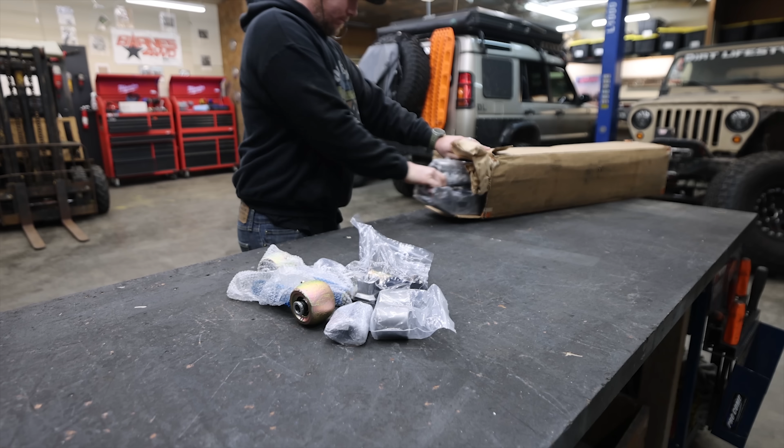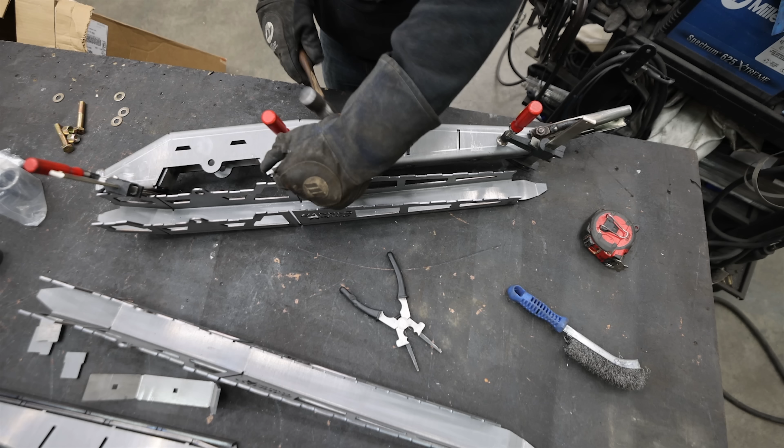I've been getting requests for quite a while now to do a build with trailing arm rear suspension. This has blown up in popularity, and it's something that's very enticing for a lot of reasons, but it's also something that you just need the right project for. And I think that I finally have the right situation to build a set of trailing arms. It's something that we can play with over the coming months. It's something we can tune. And today I'm going to go through all the details on when you would use it, when you wouldn't, and if this is something that you should start planning for on your rig.

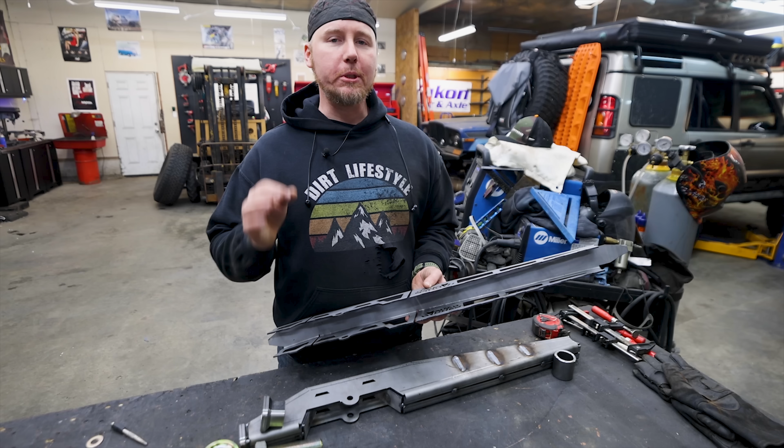Like anybody who builds an off-road truck, I want to have my cake and eat it too. So today we're going to try and keep the rear airbags. We are going to change our rear suspension to coilovers so that we can have both a coilover and a rear airbag. And I'm hoping that by the end of the video, we can have this sitting under its own weight. We can pull some measurements and calculate to see how close I got on the guess for the spring rate on such a heavy truck.

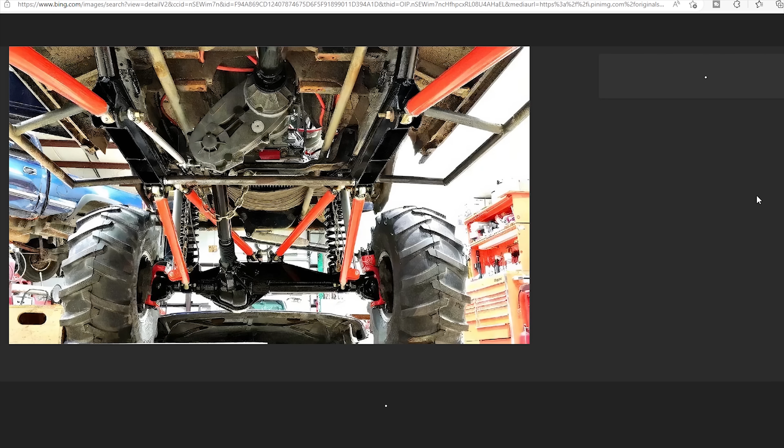The term trailing arm is a little bit confusing for some people because if you look at a modern four-link rear suspension, the arms are already trailing the rest of the vehicle. So we're not going to redesign the suspension geometry or anything in this vehicle, but we are going to replace the lower link with a link that allows us to move the coil off of the axle and move it right onto the suspension link itself in order to free up some space for packaging and give us something that's kind of fun to tune off-road for a number of reasons.

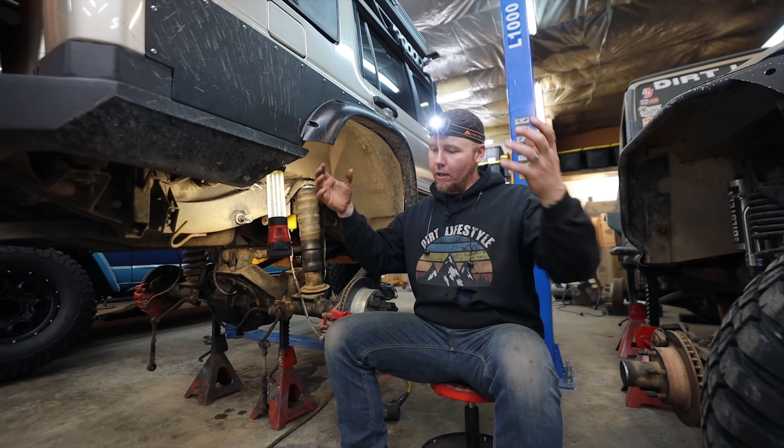When I'm building something that requires as much welding as those trailing arms, I like to do it in segments and let things cool down and then finish the next segment and let things cool down. So right now, I'm letting them cool down completely before I start to grind things and fit them into a lower sleeve that we're then going to weld up. The whole reason for that is that you don't want to get stuff super hot and expanded and then start to lock it in with other welds, and then whenever it cools down you have a whole bunch of really weird stuff going on. So that's why I want to let it cool completely. We're going to grind it down smooth enough to fit in those lower sleeves, and then we can finish weld them and we can chop and modify them.

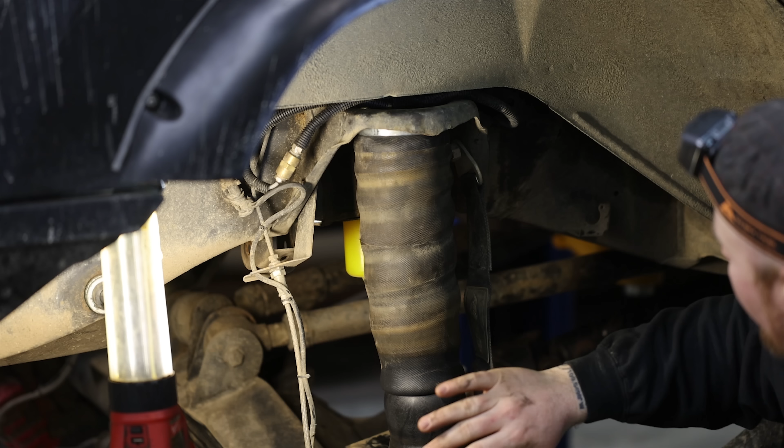So now what I'm doing just to kill some time is getting everything taken out. I already took the spring off, so we're trying to get rid of this spring altogether. I've taken the spring out, I've taken our shock out, and now we're going to just leave the airbag. This is a factory style Land Rover airbag that we're just going to leave in place because it fits here perfectly. And then we're going to pull the lower control arms. We're going to measure the eye to eye, and then we'll build the new control arms to meet that measurement. And we do have a little bit of flexibility on one side of that joint.

So right now, I am going to pull this lower control arm out, so at least we have a measurement to go by, and I'm going to go over and continue to weld up these trailing arms because that's really the first step of this entire process.

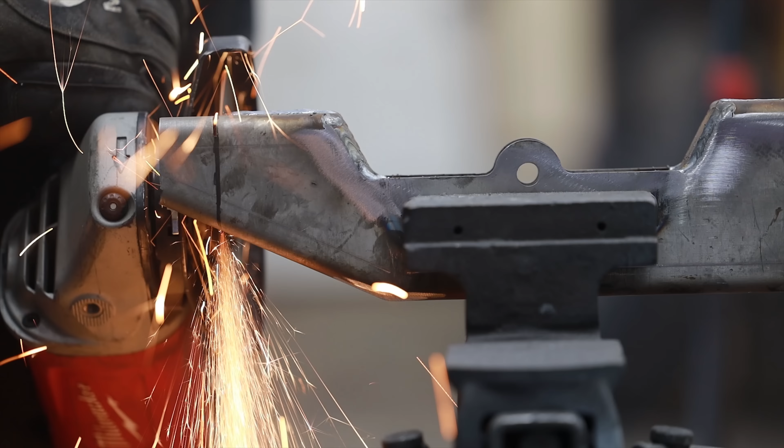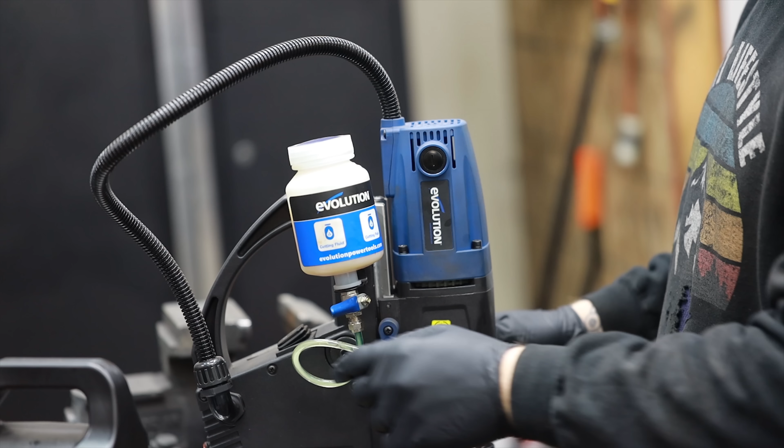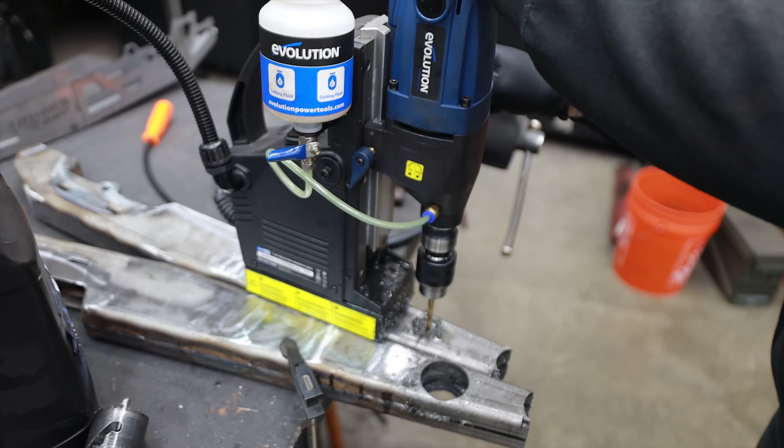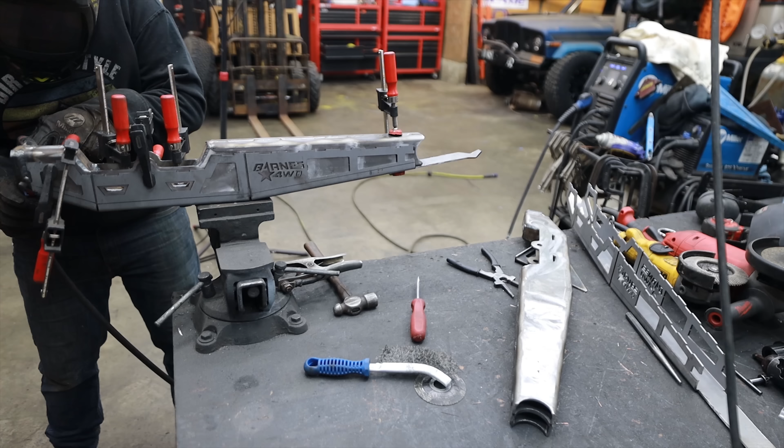The trailing arms are from Barnes 4-wheel drive, and you can buy just one arm at a time. It comes in a kit that you weld yourself at home, and they sell it in one size. I've noticed that a lot of companies will usually sell one or two sizes, and in this case, it's 36 inches. So we need to shorten it up just a little bit to make 32 inches, and then it'll fit our application absolutely perfectly. In fact, I'm going to shorten it down to 31 and then thread out that extra inch just to make sure that I have wiggle room and adjustability for alignment down the road.

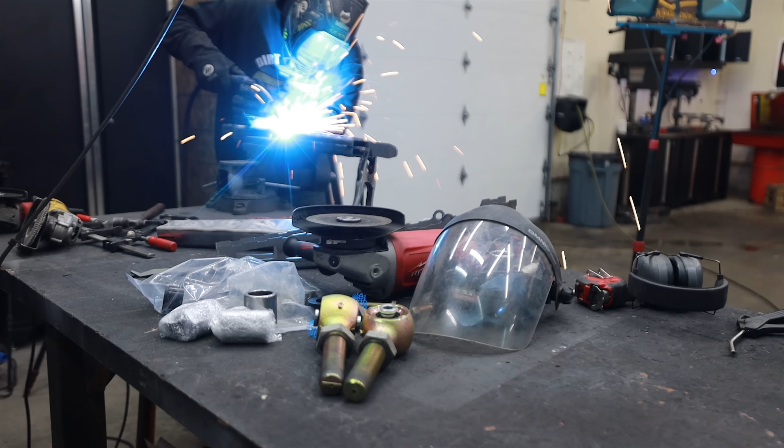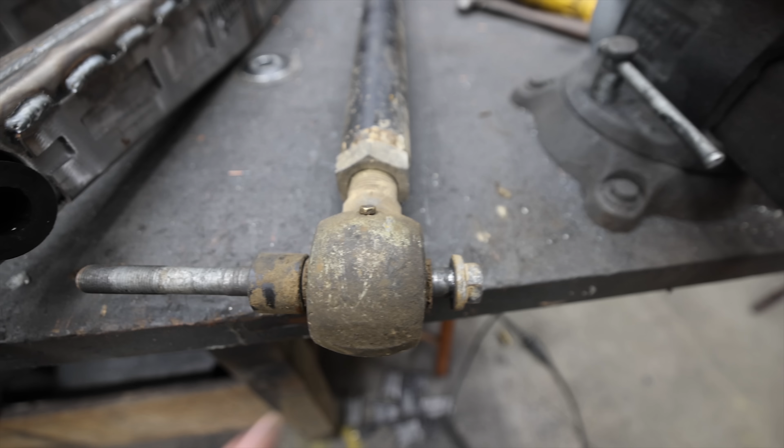I have an idea that I think is going to make this lower control arm setup better, but it's going to change the outcome of this video, unfortunately. Let me show you what I'm thinking about. This is the lower control arm that I just pulled off of the Disco, and as you can see, we have a little spacer on one side.

This is a factory, I think it was an M18 bolt, if I remember correctly, and that fits into the 5/8 joint, and I cut this sleeve in order to be able to continue to use the factory bracket that's on the Disco, but be able to use it with an aftermarket joint like this, because this takes up the exact same amount of space as the factory joint did.

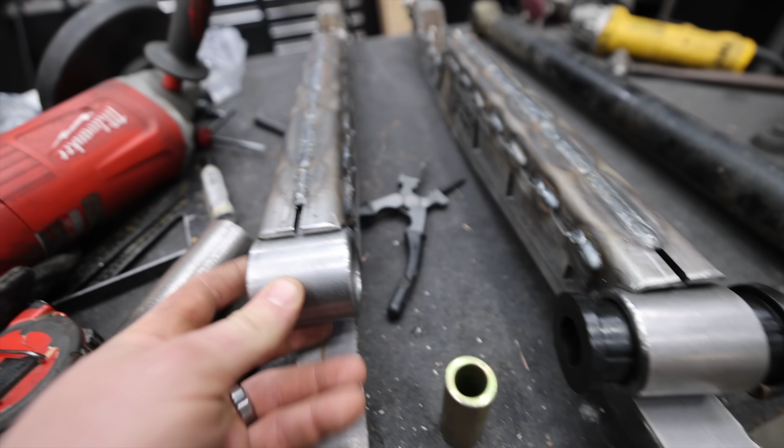Now, we are going to be going to what's just a bushing, and my original plan was to weld it up exactly like it's supposed to be. Actually, we do need to weld it at a little bit of an angle. We're just going to tack it, fit it up in place, and then we can tack the other side, and we'll have the perfect angle that we need, because these do come out at a slight angle. Anyway, that was a complete sidebar.

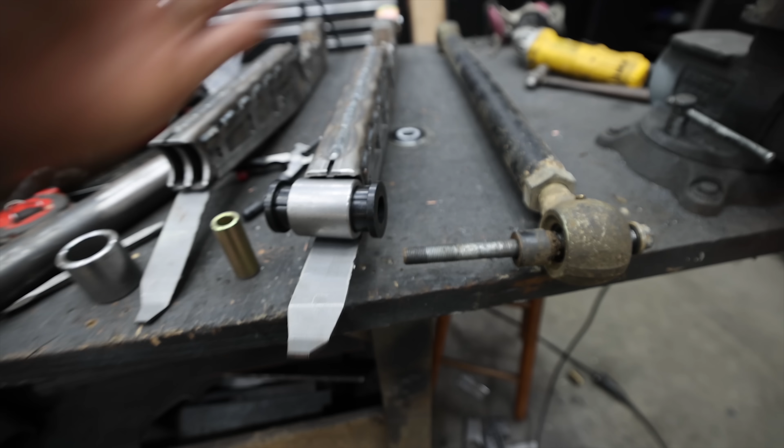What I'm thinking of doing now is this. I just took a measurement. This is the exact same measurement as that. So it would be really smart for me to, instead of using these metal sleeves, build my own out of some of this 2-inch DOM, because these bushings fit inside it just the same. So I could cut this piece of DOM. We would put these bushings in there.

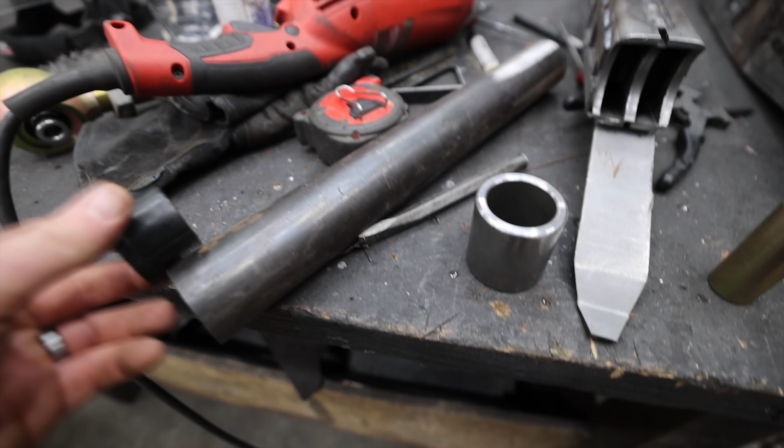I will drill and tap a fitting for a grease zerk so we can keep pumping grease into that bad boy. And there will be a little bit of a gap inside, but that shouldn't make any difference at all. This should still support from the outside of this spacer that we're going to build just fine. And later on down the road, I might be able to find bushings that are a little bit longer and put those in there.

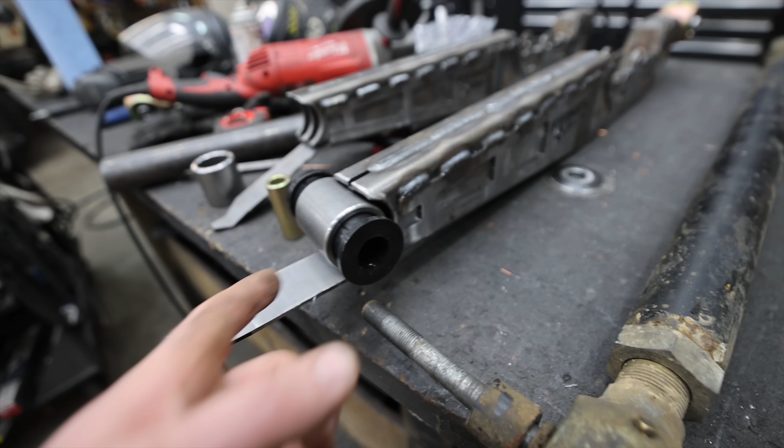So I don't know what you guys are thinking, but I'm thinking this is a good opportunity for us to get rid of extra parts and pieces and make this fit perfect to the Land Rover. And then I had this extra piece of material because we cut these down, and my plan is, once we weld this, to wrap it and then weld all the way around it to give it a super tight, super strong captured joint where it connects to the frame.

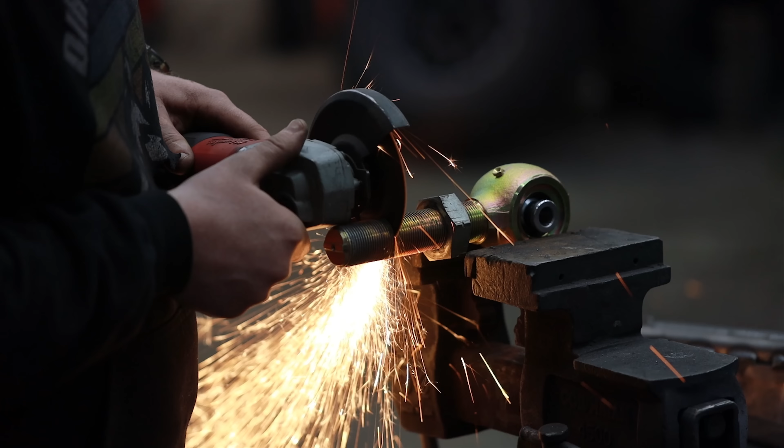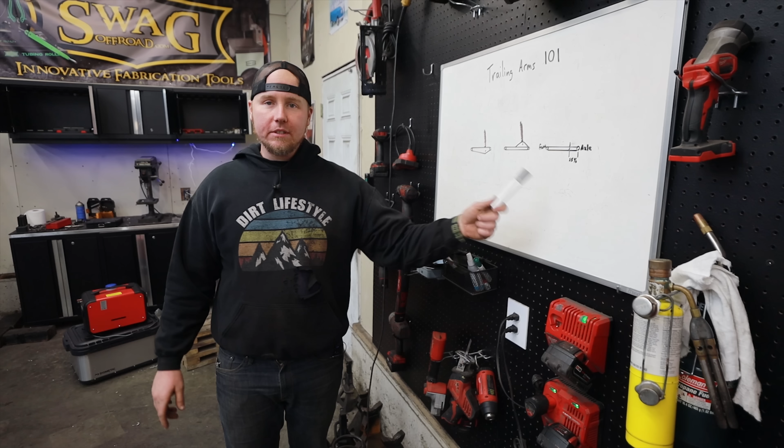If you're watching this and you're thinking, maybe I should consider trailing arms, before you do, let's talk about the very basics. And believe it or not, it's hard to find a lot of this information online. It's just in a whole bunch of different sources. So a lot of what I'm going to show you in today's video is very much like a 101, basic idea of how trailing arms work and their function. And it's based on me being around people who've built trailing arm rigs and me really studying race cars, race trucks that have trailing arms.

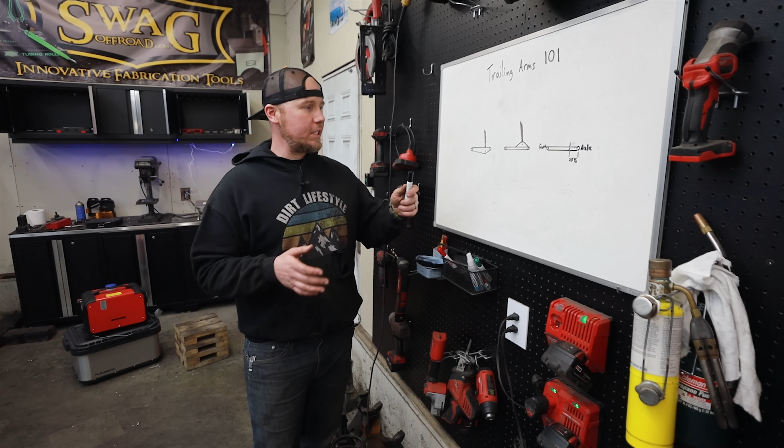So the most common style that you're going to see is what I'm going to call an underslung setup. This makes it to where the mounting point of the coilover is below the center line of the trailing arm. And this is going to help keep it stable so it's not going to want to swing and move around a whole lot. Now, I used to see these with a flexible joint on both sides, but now I see anti-wobbles on the front of all these.

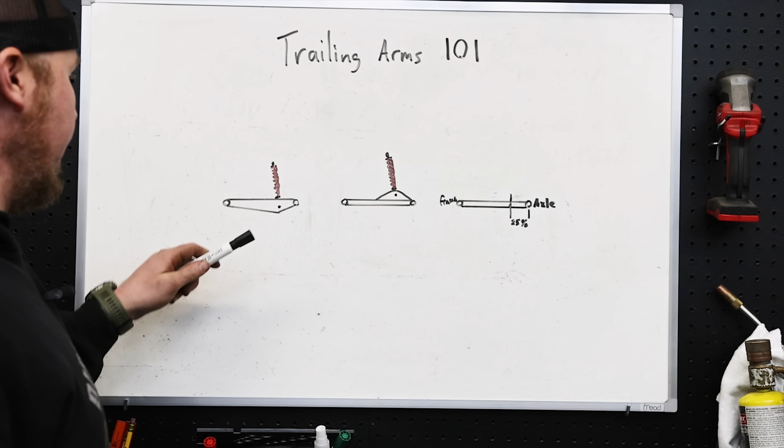And that's basically how this Barnes kit is set up. It does bolt below the center line of the arm, which is great. And it does have an anti-wobble in the front. So this is gonna really help resist it wanting to swing around as you're going up and down over bumps. I have no doubt that this is gonna stay nice and straight and true.

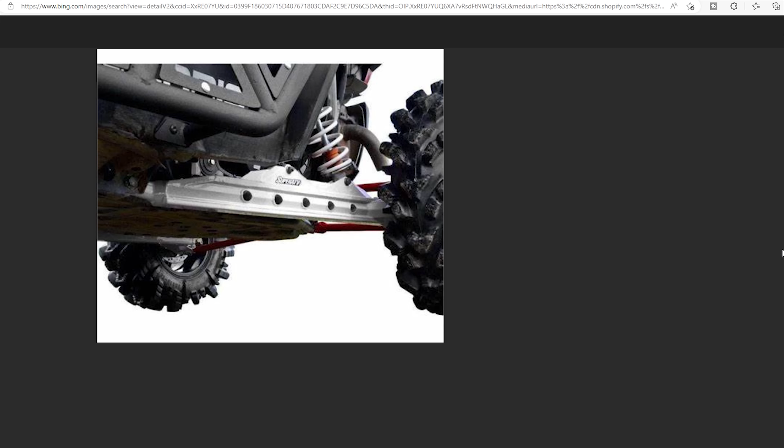The other style would be an overslung style. At least that's what I'm calling it. And as you can see, the coilover would mount on top of the trailing arm. And obviously that's gonna put a lot more side-to-side stress on the trailing arm, so you need a really strong anti-wobble.

You need something like a joint in the front that mostly just goes up and down with a very small amount of side-to-side play, basically no side-to-side play. And this is all gonna need to be really big, heavy-duty stuff.

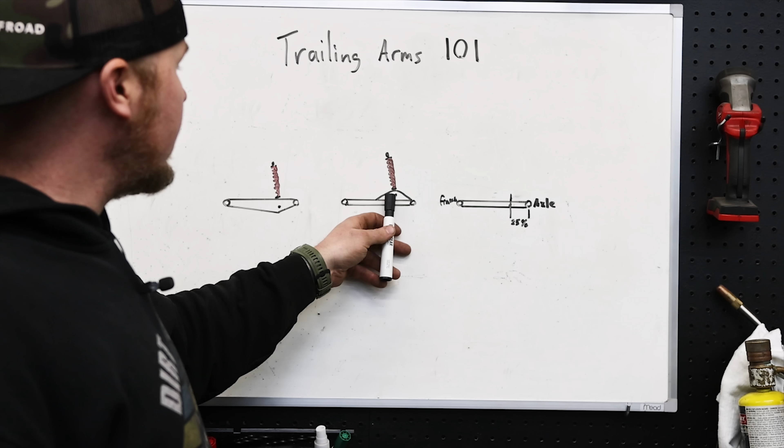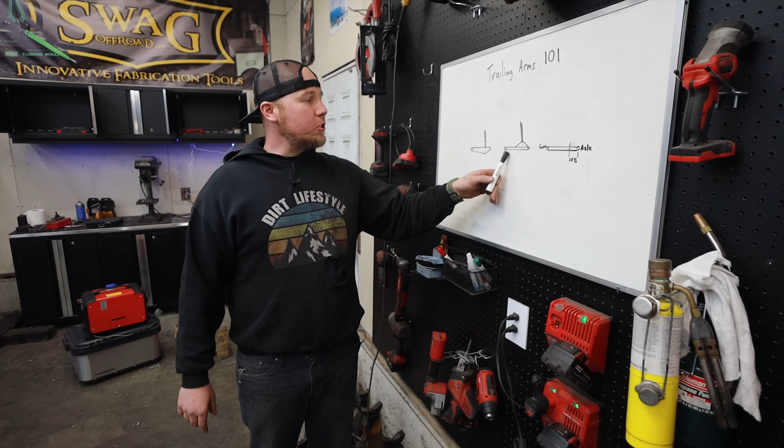A lot of times when I see this setup, it's not a fully fabricated arm like you see with this Barnes kit. It's a tube with some stuff that you bolt together and then weld on top of the tube. And the tube is usually huge. It's usually not your standard 2-inch DOM, which is already pretty big. Usually you'll see it 2.5, or I've even seen bigger. So these are the two main styles that I see used when it comes to trailing arm setups.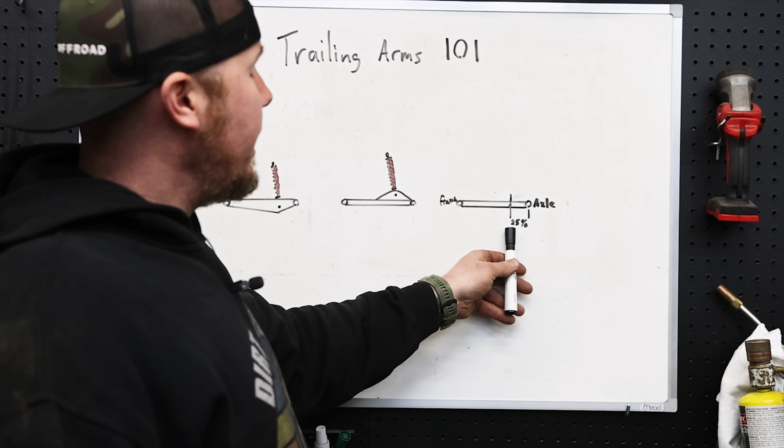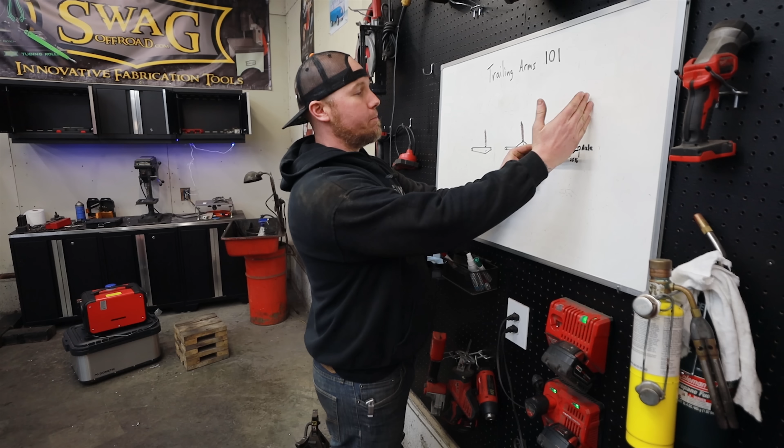Now, as far as spring rates, if you are 25% in from the center line of your axle, then you need to amplify the spring rate by 25% because you're creating a whole bunch of extra leverage. So let's say that you're mounting a spring right over the center line of the axle. That is a perfect, easy to predict, 1-to-1 ratio of the amount of force that is coming down on the spring versus how much force it needs to suspend the vehicle and keep it from

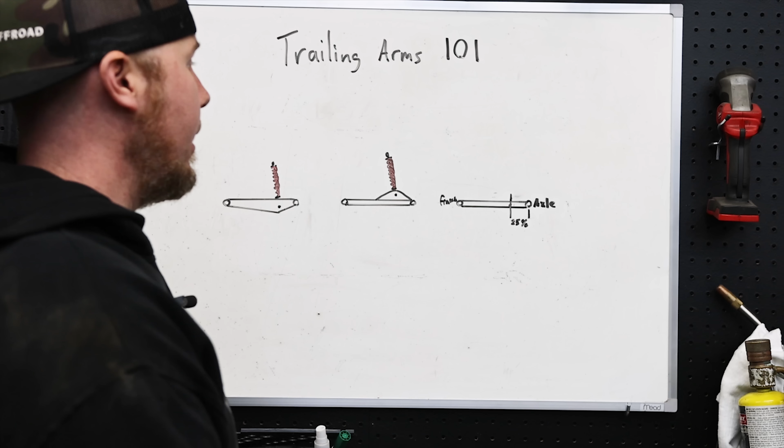bottoming out. If you move that in, you can see as an arm would be moving up and down, you're gonna be increasing the leverage on the spring. So even though you don't change the weight of the vehicle at all, the vehicle now has a certain amount of leverage on your suspension and you need to compensate for that. If you go in 50%, you roughly need to increase your spring rate 50%.

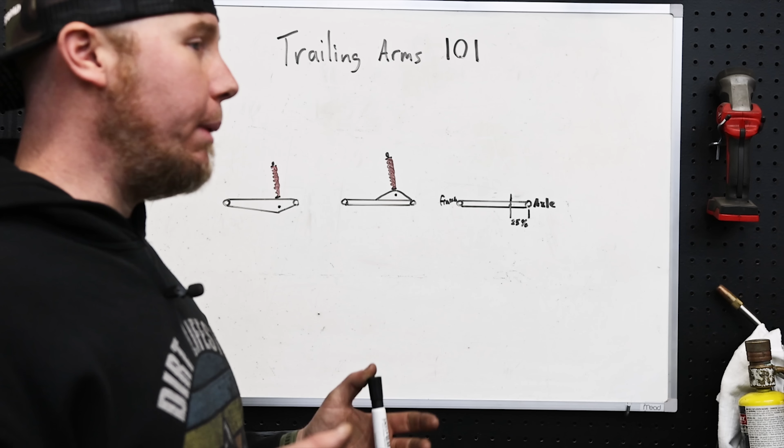So the kit that we got from Barnes, I calculated it out and it was 30%, which is pretty standard. And the way that I cut it, we should still be at about 30%. I had a hard time finding what the spring rates were for the coils that are off of the Disco. I figure they're probably close to 300, and so plus 30% isn't exactly 400, but I ordered a set of 400-pound springs, and now we can run over to the table and we'll talk about the rest of the setup.

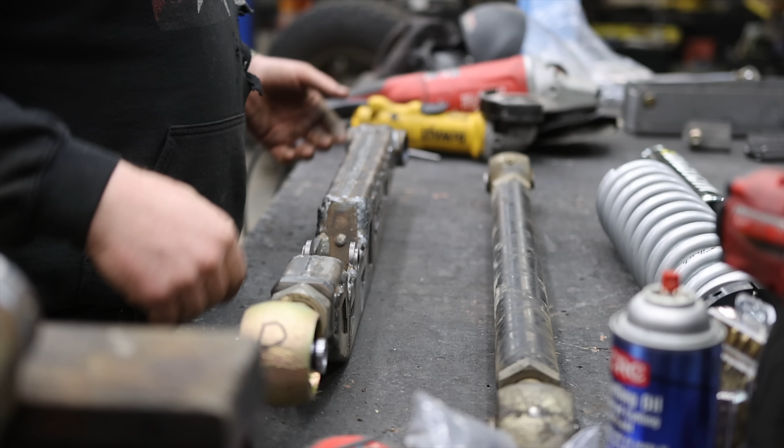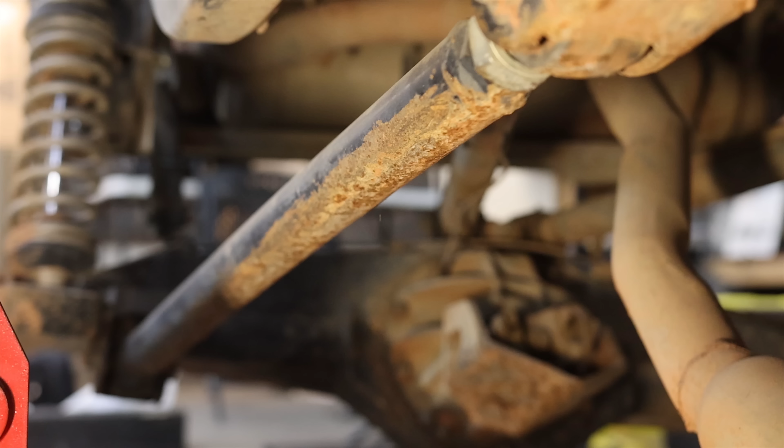An obvious pro of running a trailing arm... God, that thing is heavy. An obvious pro is strength. This thing is tall, it is beefy, it is definitely gonna be stronger than its counterpart, which would just be your standard 2-inch by quarter wall DOM lower. I've bent so many of these. In fact, all 4 of my lower links, which are this exact same material on my TJ, are bent just from 3 really hard years of hitting hard off-road trails all over the country. It's super fun, but super taxing.

And if you're somebody who needs a really long lower link, like the ones on the TJ are like 40 inches or so, this one's like 32. The longer you go, the more prone they are to bending. And so this is not a bad option. It's a fabricated link. It's super strong. So in the pro department, strength is definitely up there.

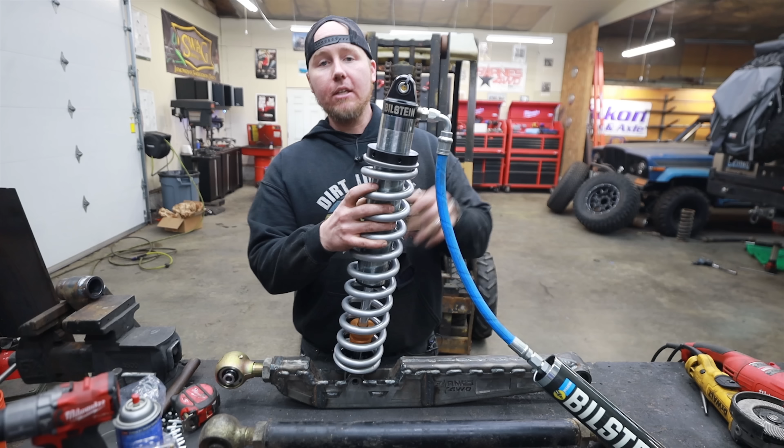Another pro is packaging. And this is the reason that we're doing this on the Disco. We can put our airbag in the back, just like the normal factory spot, and we can move a coil up here as a fail-safe. I want to have all the benefits of an air system without the one huge con. If the air system fails or you blow out a bag, you're dead in the water unless you fix it or replace the bag or whatever the situation may be.

Because I'm running dual suspension systems, this is going to be our fail-safe. So I want this to be able to run down the road just fine with 0 air input, but I still want the benefits of the air. I love having an air system. Again, I just want to have that fail-safe whenever we go on really long trips. So this is going to give us the ability to do that.

Another pro, we can run an 8-inch stroke coilover. This is a really short coilover and still get plenty of wheel travel because the trailing arm allows us to basically compound that travel by the time it gets out to the tire, freeing up just more.

It's just packaging. It's all about the packaging. So cons. Because it takes so much more wheel movement to make the shock influence the ride, let me make sure, I'm just trying to explain this the best way I can. It makes it to where we're gonna have to revalve the shock. There's no doubt about it.

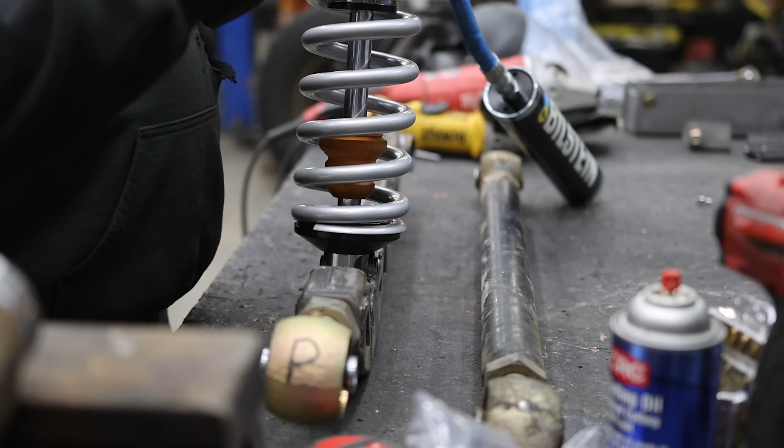We're gonna have to neck down the flow in this shock as much as possible to make it to where on the highway, the Land Rover is just not super floaty. It's already top heavy, right? So we're gonna have to neck that down. Why is that a con? Well, not only do we have to open this up and change it and buy extra stuff, but it's also gonna make it to where in the wrong build, you can build a ton of extra heat because you're making it harder for the oil in the shock to flow through, and that is going to build extra heat.

So if you're watching this and you're wanting to put together a desert setup, I would highly recommend running dual shocks. Complete sidebar here, guys. But dual shocks are gonna make it to where you can split that valving. You don't have to go near as hardcore with the valving, which is gonna make it to where it's not gonna run as hot, and you're gonna be able to split the heat that it takes to dampen the ride amongst more shocks, which is gonna make everything run way cooler.

So we're gonna be able to get away with this because the closest thing to desert running we're gonna be doing is just bombing down dirt roads on the way to camp. Rock crawling isn't hard in this kind of setup, you know what I'm saying? So you just gotta think about those kinds of things whenever you're picking out what suspension style you wanna do. Another huge con to this is clearance. So if you do wanna do rock crawling, I wouldn't recommend this system.

I mean, I know that it's really cool to do trailing arms. It makes you feel like you're driving an Ultra 4 car. They're rad, and they're super neat. They're really pretty. I mean, come on, this thing looks amazing. But most of us don't need them. Another big con is weight. Are you trying to keep the weight down? This is not the route.

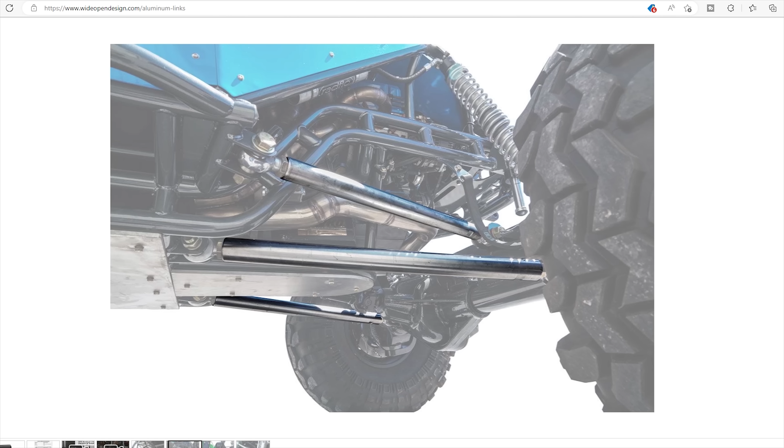You can get away with doing one of these, and if you bend these like crazy, you could level up to an aluminum lower link. Those are actually made to bend and contort and come right back to straight. So there's other options out there, but in our case, I really believe that if you're me and you want to have your cake and eat it too, this is like the only way that I can do that and get everything that I want.

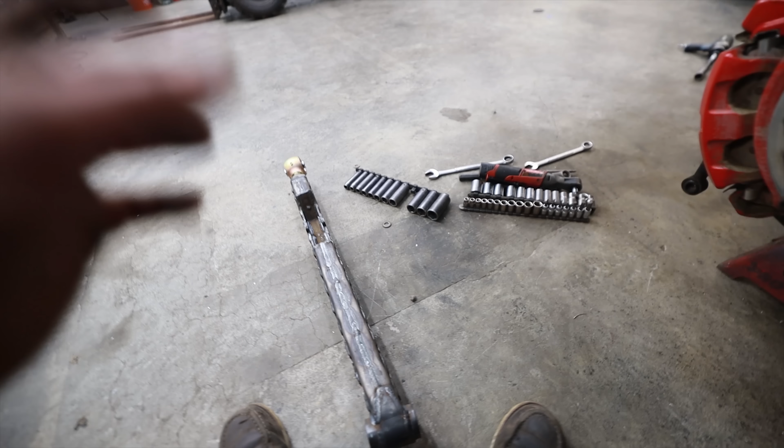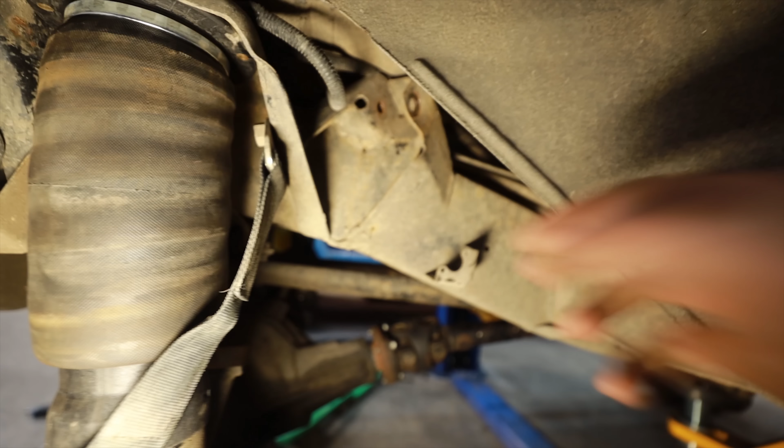This video just turned into 2 parts, and it's kind of dumb, but let me show you why. Because we widened this out, I'm having a hard time finding the sleeve material for the inside of our bushing, which, God, that feels like such a dumb reason to not be able to continue, but it's really important, and I want to paint this. We still have some work to do up here. We got to clean this up, and we're going to modify this guy.

And when you couple all that together with the fact that we want to revalve our coilovers in the same episode, which means we're going to have to go take it wheeling, I think that we just have too much to do in one episode.

So if you know a place online that I can buy some 5/8 inner diameter, 3/4 outer diameter sleeves, even if I can buy just stock, like a foot of it, please let me know in the comments. I want to order this ASAP so that we can continue on this project.

I'm super pumped to get this on the trail, and that's what I want to do in the next episode: we're going to get all this together, we're going to drive it, we're probably going to revalve it, and it should be a pretty fun episode just to see how all this turns out.